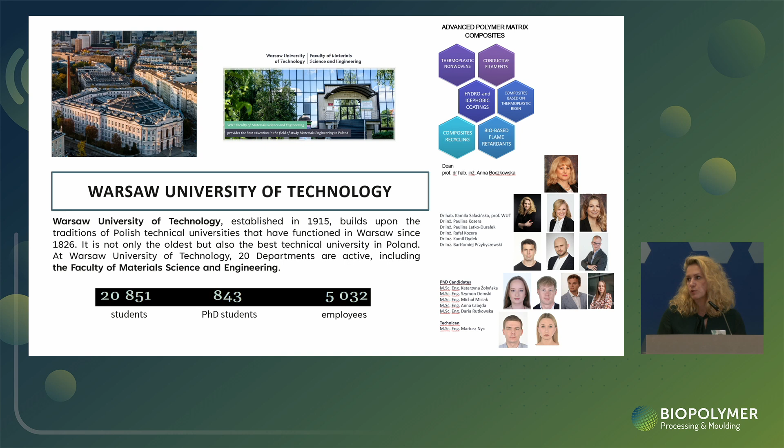Warsaw University of Technology is one of the oldest and biggest technical universities in this region. However, my faculty is the smallest faculty in the whole university. I work in an advanced polymer matrix composite group established by Professor Boczkowska, who now is the dean of this faculty. So my presentation will be more from an academic than business point of view. However, I hope that it will be interesting for you.

When you put the word biocomposite in the ScienceDirect knowledge base, you will find a lot of articles and books with different definitions. Even in these publications, you can find the statement that, depending on the publication, the definition can vary. So, as a biocomposite, we can treat natural fiber reinforced biopolymers, which were developed as an alternative to conventional non-renewable materials. Or, as a biocomposite, we can treat biocompatible or eco-friendly materials, which can be treated as eco-friendly composites, or can be used in biomedical applications.

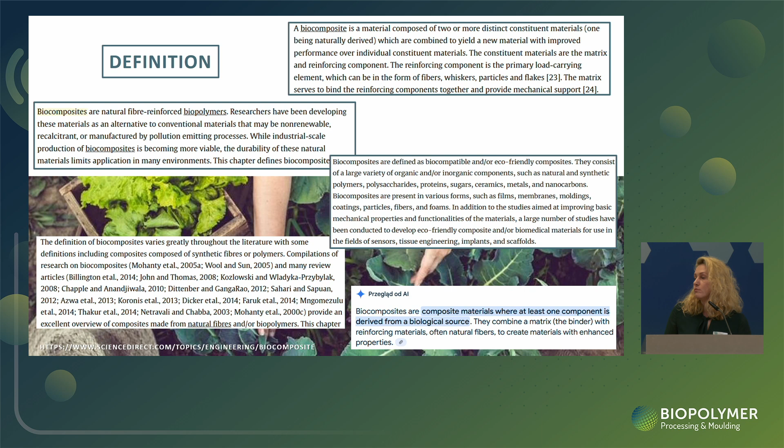Also, as a biocomposite, we can treat a material which is composed of at least two materials, one of which is naturally derived, and we mix them to achieve mostly a new material with better mechanical properties. This definition is close to the definition proposed by AI, which is quite good, and best, I can say, compared to Wikipedia, for example. I chose one which is more connected with my knowledge, and based on this definition, as biofillers we can use, for example, parts of a lignocellulosic plant.

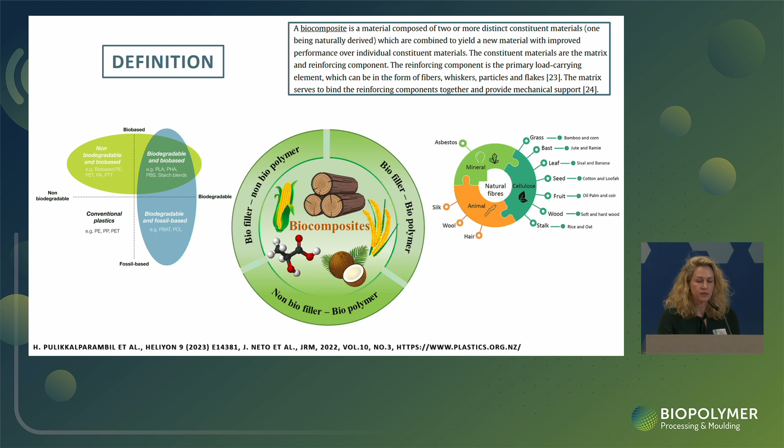However, because of their quite low thermal stability, we usually use polymers with quite low processing temperature, below 200 degrees Celsius, and can mix them with non-bioderived polymers or with bioderived ones, also in some cases biodegradable, or we can also mix non-biofillers with biopolymers. So depending on the composition, we get a biocomposite which can degrade in specific conditions in a composting plant or not. We can produce them using different well-known techniques which are used in the polymer composites field. However, we usually try to produce new biocomposites to replace the well-known synthetic composites.

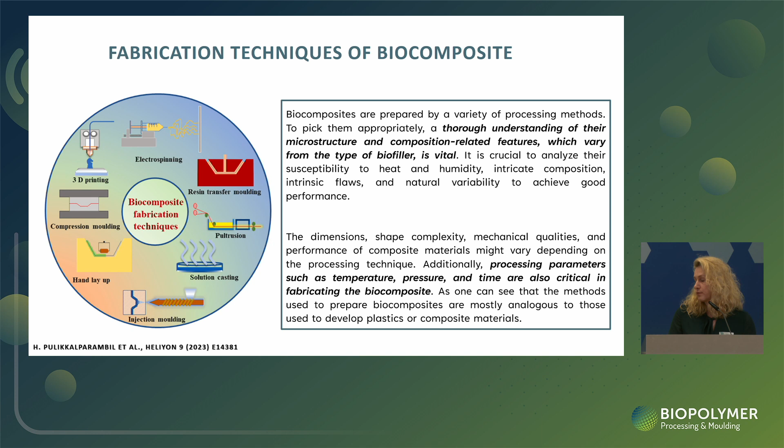Unfortunately, natural fibers cannot be employed as reinforcement in the same manner. We have to accept that they have a different sensitivity to heat and humidity because of their different microstructure and also because of the different chemical composition. So we have to accept their natural variability. We also have other issues connected with economic and environmental challenges. For example, we usually say that biocomposites have a lower environmental impact because of photosynthesis, and also because of a reduced carbon footprint.

However, it's very important what we do during their whole life. For example, an important issue is waste management or some modification. Another important issue is some processes which we use during cultivation to minimize the heterogeneity of our plants. Also, we use a lot of water and lose some biodiversity. Another issue is that this industry, unfortunately, will always compete with agriculture, biofuels, and textile industries.

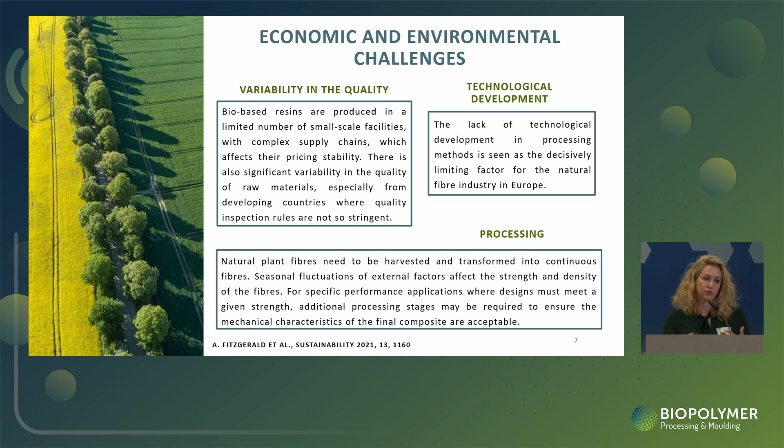Also, bio-based resins are usually produced in small-scale facilities with complex supply chains, which influences the prices and also the quality. In the case of natural fibers, unfortunately, we also have to accept some seasonal variability, which influences the strength and density of the final product. So we have to use some modification or some additives. And one important issue: because we usually produce our natural fibers using quite old, well-known techniques, they are moved from the east to the west part of the world, so we also have to add the transport, and usually lower quality.

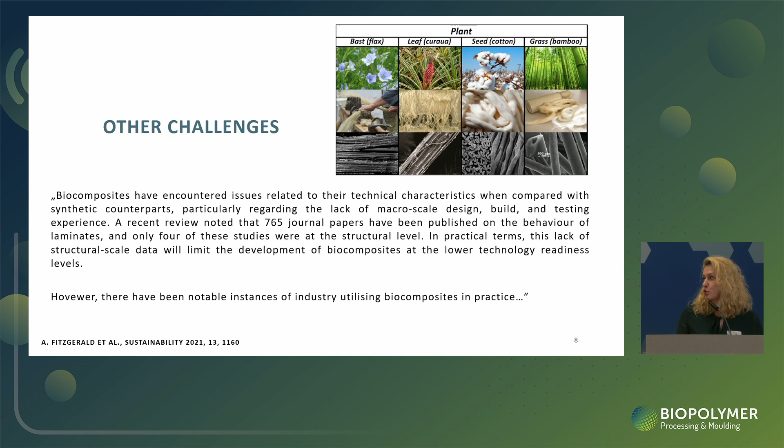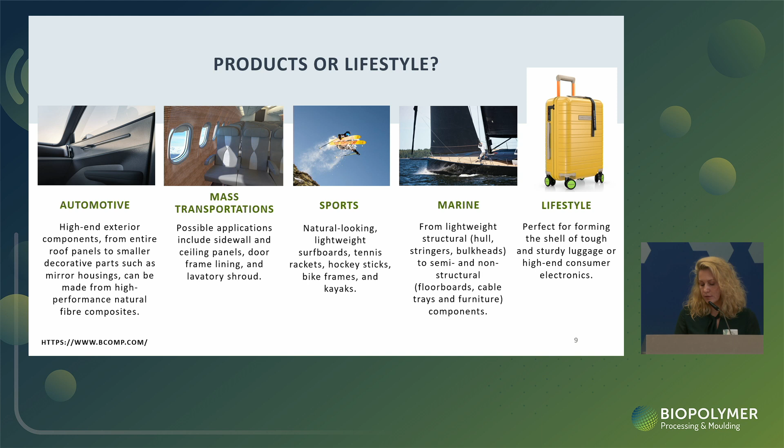The authors of this publication also raise another, I think very important, issue. We have a lot of publications concerning the properties of the final composite product, for example, natural fillers with laminates. However, only a few of them are linked with the basic properties of the used fillers, for example, their chemical constitution or microstructure. So this is a gap in the knowledge. Fortunately, manufacturers usually use their own experience, or they make a lot of trials or add a lot of modifications and additives to get the final product with the desired features, which can be used in different sectors of the economy to reduce the environmental impact, weight, carbon footprint, and also to increase the aesthetic function of the final product.

I divide producers in Poland into 3 groups. The first one is natural filler suppliers. For example, Safilin is a European flax and hemp spinning mill with factories located in Mazury in Poland. We have 3 companies there. They produce roving and textile reinforcements for biocomposite production.

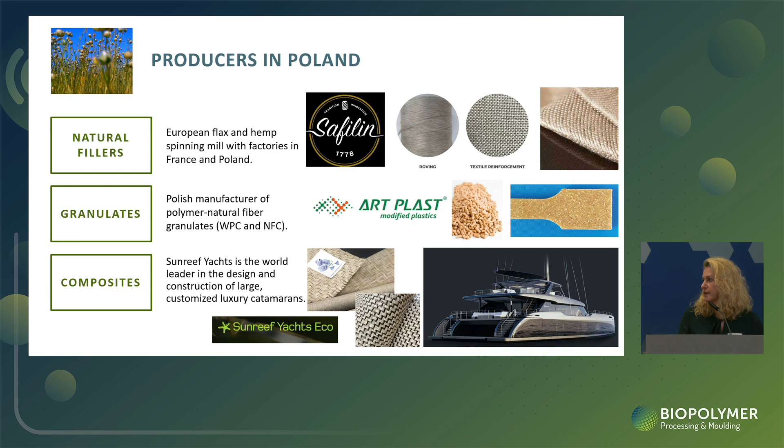The other group, granulates. In this group we have manufacturers of polymer natural fiber granulates for the production of different types of consumer goods, which can be found, for example, in IKEA. But also the largest group, producers of composites, mainly laminates, for example, to produce their final product, like the company presented on the slide for luxury catamarans, which uses flax or flax with basalt fiber textiles to produce their final product.

Apart from the quality issue, we also have an issue connected with the price, and I would like to show you how the price of composites and wooden boards changed over the last decade in Poland.

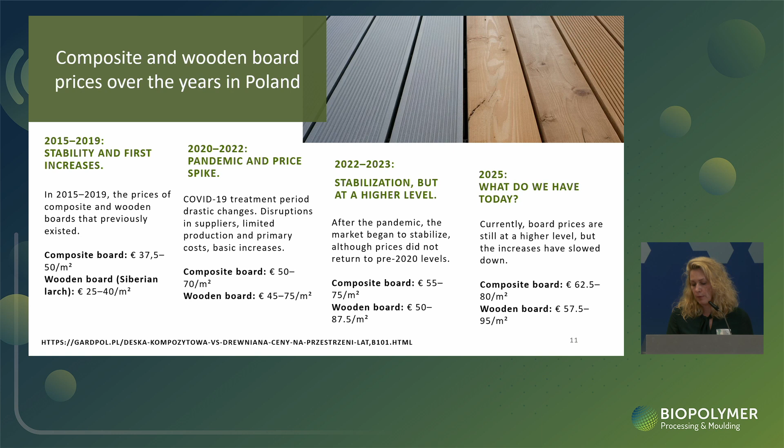So, about 20 years ago, when I started my journey with natural fiber composites, I would like to buy some composite for my balcony. However, it was impossible because of the high price. It is still quite expensive. I am a scientist. However, I know that it's expensive not only in Poland, but in different parts of Europe. So what can we do?

We should reduce the price, reduce the quality of the product, go to use waste instead of wood, for example, which is quite expensive, or go to a high quality new product with a lot of modifications or additives. Definitely we should go green, or as my favorite professor said, eco-nonsense. However, he also knew that it is the future.

I would like to show you a few examples of products which we do now in Poland. We used to work on polymer composites, biocomposites. Now we specify our work more, focusing on some special features of plants which could be beneficial for the final product. And this is an example of a project done at Poznań University of Technology.

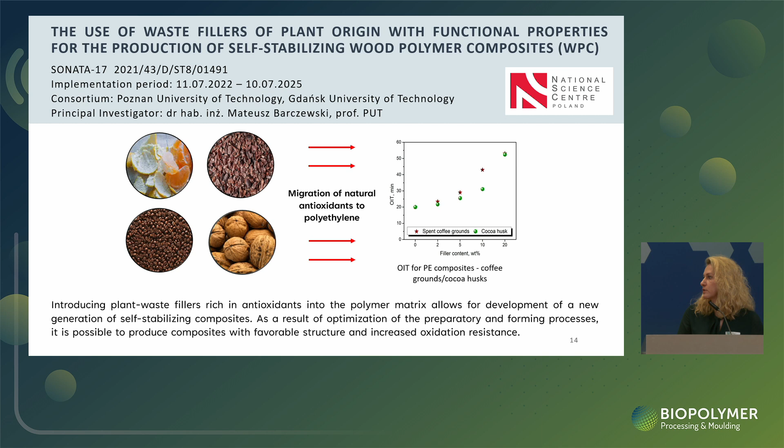My colleague used a waste filler of plant origin with some functional properties to self-stabilize wood polymer composite. They use some specific plants, for example, coffee or walnut shell with antioxidant ingredients to increase the oxidation resistance of the final product. The same group is also using thermal or thermomechanical modification to prepare new fillers for natural fiber composites, which can be used in thermoplastics, for example, with a higher processing temperature.

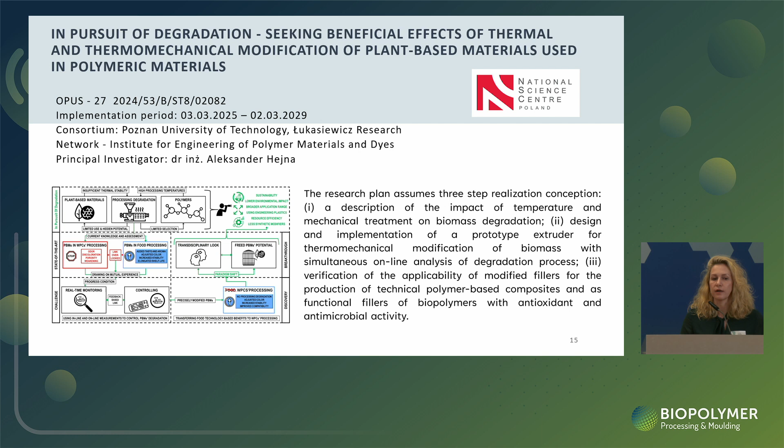I also use these fillers for my project. I am involved in flammability reduction science, so in this project, because as a polymer I use polyamide with a quite high processing temperature, I have to modify my fillers, and we use thermal treatment, during which we change the chemical composition of the plant.

From the flammability reduction point of view, it's beneficial because I reduced the content of more flammable ingredients like oils or waxes, and increased the content of cellulose and lignin with a lot of hydroxyl groups, which because of phosphorylation lead to the formation of a char layer on the surface of the materials.

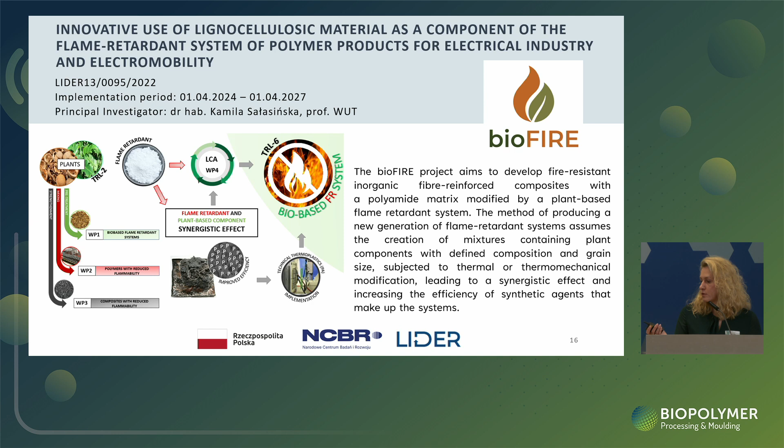This research field was developed based on our previous research, in which we introduced walnut shell or husk to epoxy resin, and observed that it produces some char on the surface of the materials, which reduces the heat release, but also influences the emission of gases and its toxicity.

However, they cannot be treated as commercial flame retardants, so to increase their effectiveness, we combine them with a synthetic one. This one was developed by my colleague. It was based on histidine. And we observed that after the burning process, on the surface of the materials a 10 centimeter char cover was built, which reduced the heat release rate compared even to commercial solutions from the market.

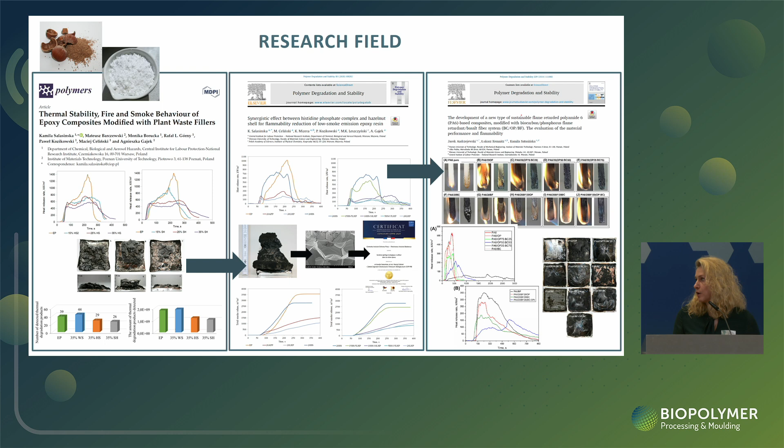And we also observed that the combination of specific plant ingredients with some synthetic flame retardants may even change the mechanism of action of these synthetic flame retardants and especially increase their effectiveness. We continue our research in a European project. In this project, I will be involved especially in flammability reduction. We will also develop a new flame retardant system for composites with a vitrimer matrix.

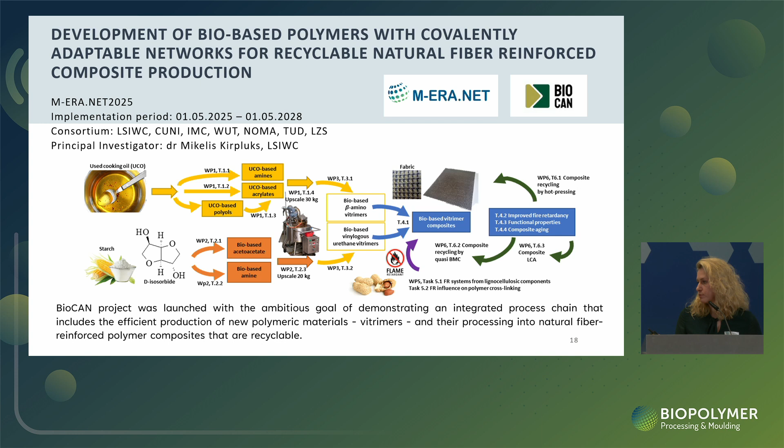And to conclude, definitely go green. However, remember that we have a gap in the knowledge, so please first characterize your fillers and link this knowledge with the final properties of the composite, because probably you will find some beneficial additional features which lead to a reduction in synthetic additives, and you can also increase the sustainability of your final product.